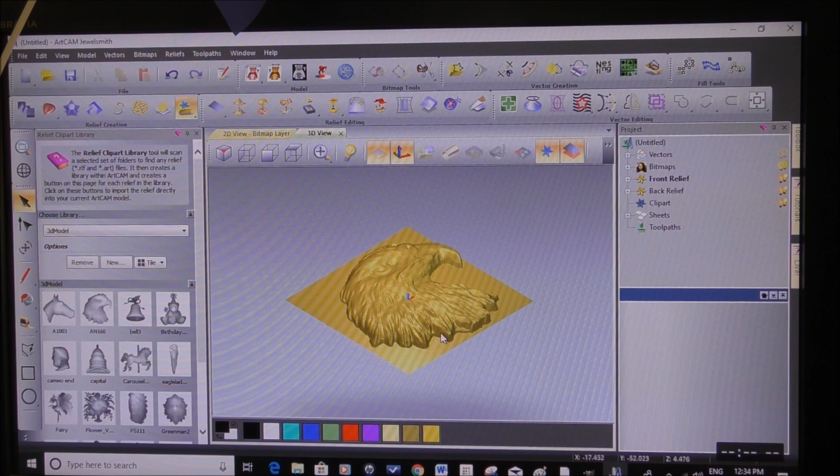So now to convert that to 3D, to find out what it actually looks like, just press 3D view, and we'll get rid of that.

Now to move that around, up here you'll see a little world, the Twiddle View. So we'll select the twiddle, and what I'm doing with the mouse is coming over with the cursor, holding the left mouse button down and just moving the mouse around.

Now if you want to enlarge that, you go to the mouse wheel and turn it one way or the other. If you want to move it bodily, hold both mouse keys down together and you can move it around on the screen wherever you want. This is just the left key, and zoom in with the left key.

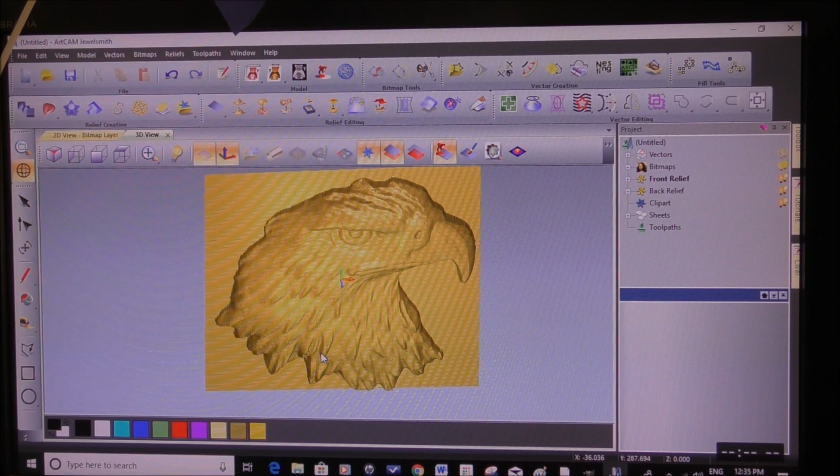So you can turn it over and see exactly, it's a fairly deep 3D, a fairly nice looking 3D.

Okay, so now we come to the choosing tools and machining this. I'll show you a little bit later how to choose a new tool. So what we'll do is go into toolpaths. If you press on this, you'll get a flyout box down here, and you just come on here and scroll down.

But for a normal type of 3D carving or relief, it's this one here, the very top one in this three-dimensional toolpath group. Double click that and we get this wizard.

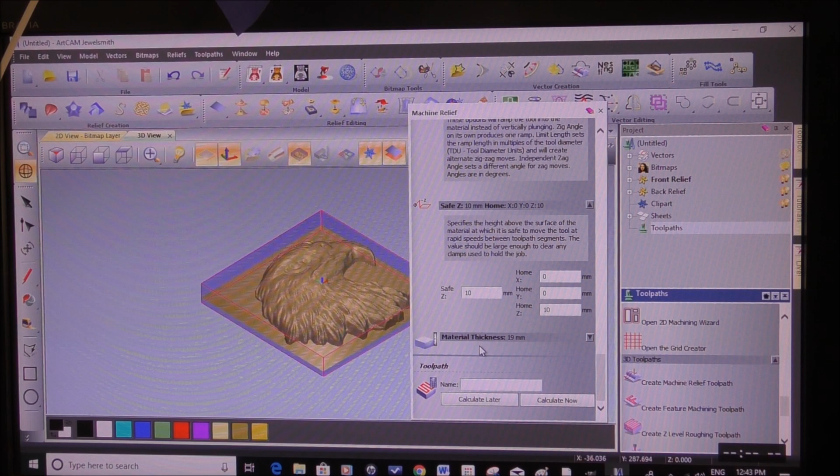And then this comes up, and you can check it visually that there's the material that's left, and there's the eagle head that is going to be left.

Okay, so the last thing we need to do now is name this toolpath. I abbreviate everything, as long as you know and can recognize what it is, that's fine. So we're going to say here, just abbreviated, as long as you can understand what it is. And calculate now.

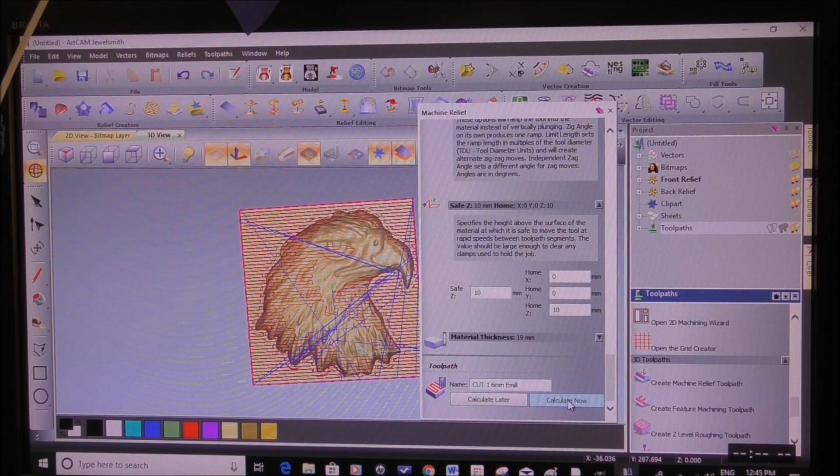And that's done. So we can see here.

Okay, so you can actually see that it's got 1, 2, 3, 4, 5 - that's going to do that in 5 cuts. That's going to take a fair bit of time, so I think we can probably reduce that.

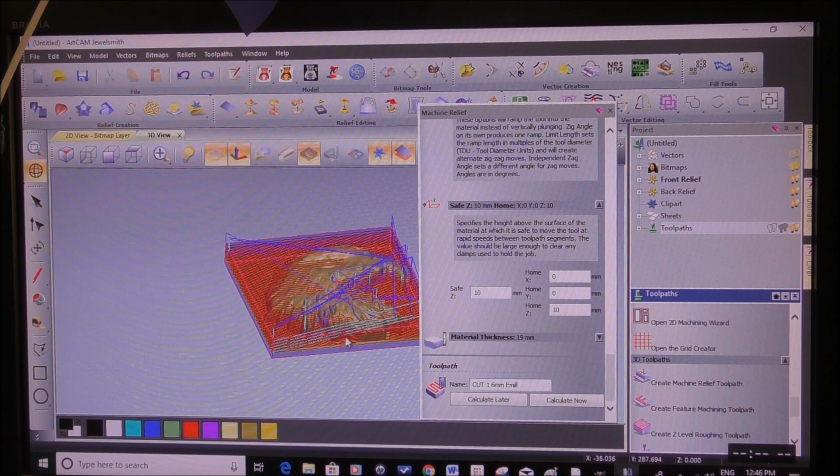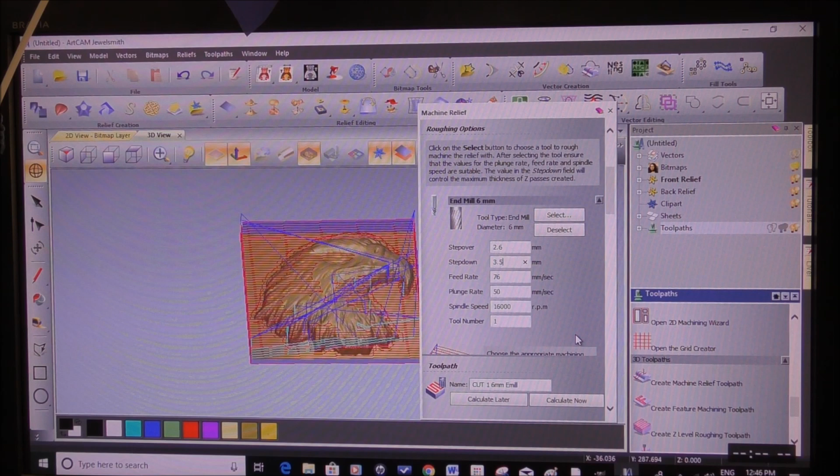So just to save a little time, we go back up here and put in 3.5. Now that should reduce it significantly. Recalculate. Okay, 1, 2, 3, 4 - so it's going to do that in four separate cuts, which is more acceptable.

Don't forget, this is a 6mm tool. I want to use a 6mm tool because I want to get rid of a lot of the material in and around here and up in here. If I'd used a 10 or 12mm end mill, there would be a lot of material left around here that the little 2mm would have to hog out, and I just want to do one cut with the 2mm, so you get out as much as you can. So it's necessary for us to use a smaller diameter tool for the roughing.

So okay, we'll get out of that one. We go back in and choose again, and this time we're going to do the finishing option. For the finishing option, what we're going to do is we're going to choose...

Well, actually the tool that we're going to use is a 2mm tapered ball mill. I'll just get one of those. Now this is a 1mm R, so that's a 2mm diameter end of the tool. This is a tapered end mill. It's 30.5mm in length of the cutter, 75mm overall, 6mm diameter, and it's a 2 flute.

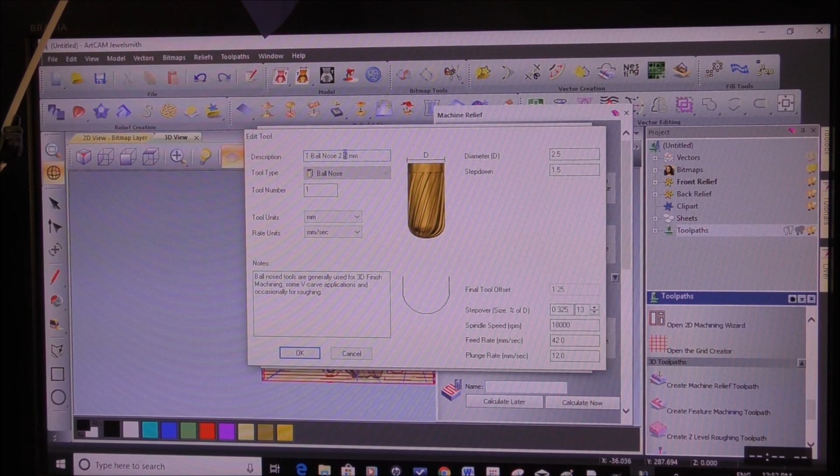We're going to say edit - we want to edit that copy now. So it's a ball mill, but here we're going to write a capital T space - in other words, it's a tapered ball mill. And we alter that to a 0. So it's 2 millimeter diameter of the tool, 1.5 millimeter step down. This really doesn't matter because you can alter these figures in the wizard later on when you choose a tool.

So I'm going to say this is okay. Tool type - that's okay, we can leave that, we've already recognized what it is there. The tool number doesn't matter unless you've got a tool changer. Units, millimeters per second - this is fine. So now we're going to OK that, and there it appears in our tooling list, right there. So that's there now for forever.

So we're going to select that one. Go back in here now, and there it is - it appears here because we selected it. Now we can alter it if we want to. 2.6 - I don't want to alter it. This is already set up pretty well.

Actually, the feed rate can go quite a bit further than that, so we're going to say 60. Now I'm putting 60 millimeters per second feed rate in here, but we can alter that in Mach 3 - we can speed that up. If this was the 6012, that would be 80 or even 100 or even 150 millimeters per second, and the 6012 will cut it. This is a slightly smaller machine, and 60 to 80 would probably be maximum for it.

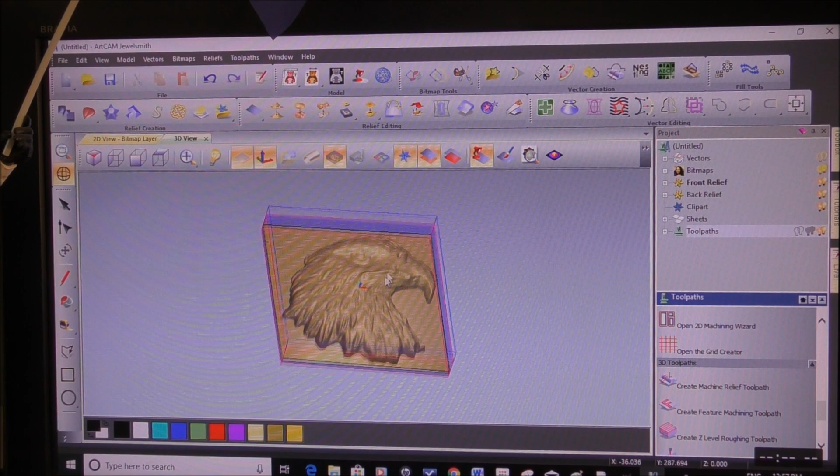This should turn all completely red. Now, while it's completely red like that, we can't see very much, and we've got both tool paths there all mingled together. So what I like to do is come over here to the tool paths and expand it.

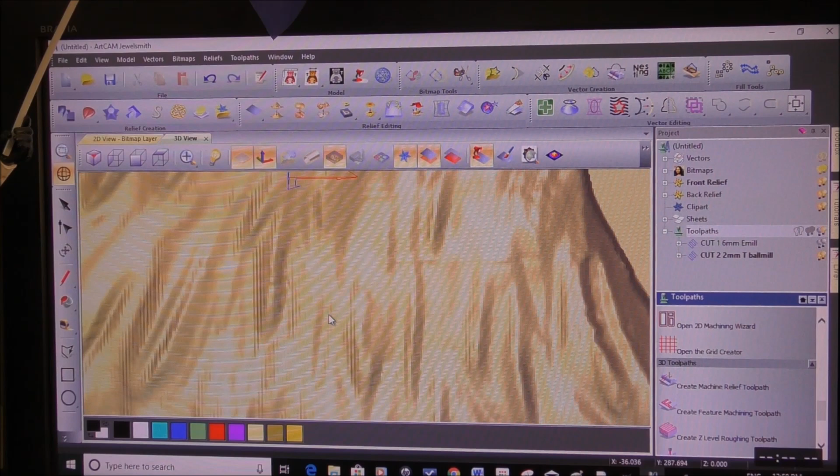Now what I can do is zoom into this, and you can see this is all individual runs. Each individual line is a pass of the tool. So you can see it's very dense. If we turn it over a bit, you can see it's like a 3D contour of a map, if you can pick out the individual lines there.

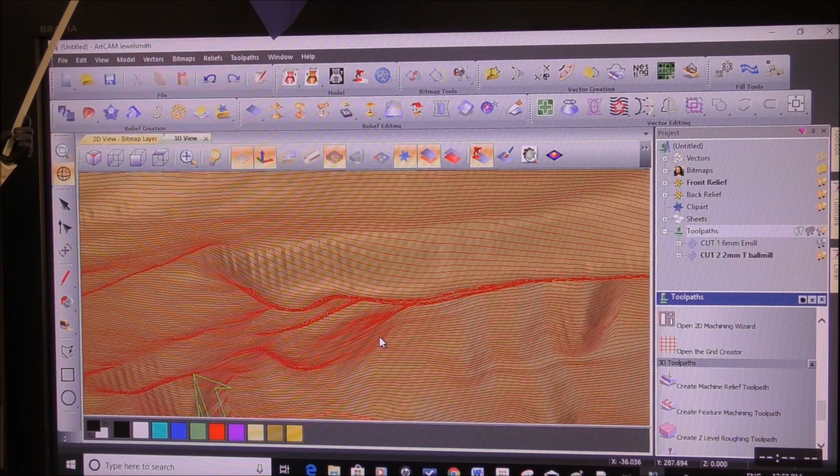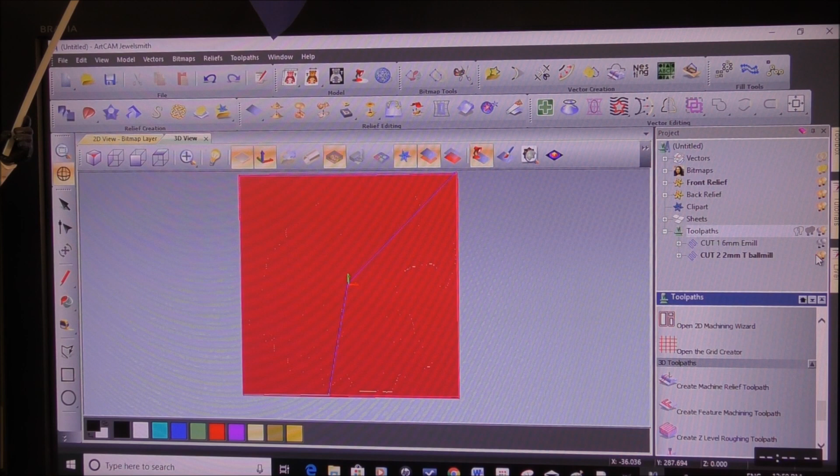Perhaps that's a little better. So there's a lot going on in this picture, it's a mass of... anyway, let's come out of that now. There we go, so you can see it's very busy in there. Okay, so we turn that one off and we're left with that.

I think, just to make sure there's no problems, if we scroll all the way down here, we can simulate all toolpaths, which is what we'll do, and we'll take the standard, and here we go - so this is exactly what you will get.

Okay, I don't particularly like it in silver, it doesn't really show. I prefer it sort of gold. Now I'll show you how to change the material. You can't actually do it here, so what you've got to do is come up here, press on simulation, which brings up the simulation dialog, scroll down, press simulate default. Now this gives you all the different defaults you can view this item in. If you wanted wood, we'll say beech, and we'll apply, and it is in beech wood.

So there's many different - actually that's quite nice, isn't it? I quite like that. That's quite nice. And if you wanted to, you could change it to 18 karat gold if you wished. Apply - which is a bit too shiny for my liking. 9 karat gold - still a bit shiny. Polished gold - real shiny.